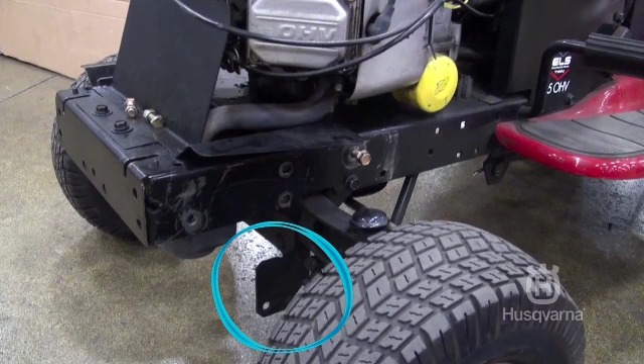This segment will show you how to attach the side plates for a tractor with dual front deck suspension brackets. Please note, if your dual brackets look like this, then please skip ahead to steps 5 through 7.

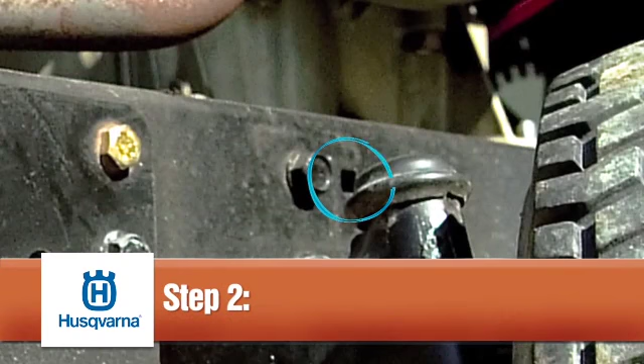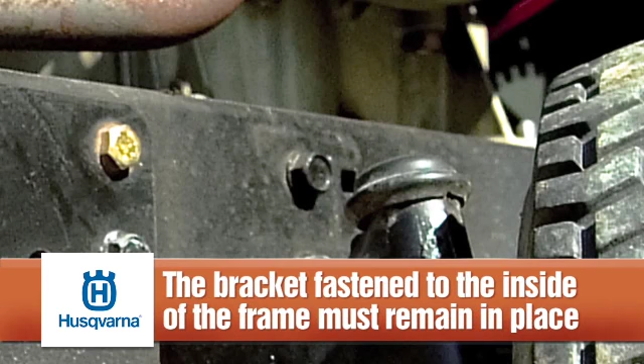Step 1. Remove the bolts from the front 3 holes shown. Step 2. If a bolt is present in the 4th hole, replace it with a 5/16 inch by 1 inch carriage bolt, part J, without a nut. Please note that the bracket fastened to the inside of the frame must remain in place.

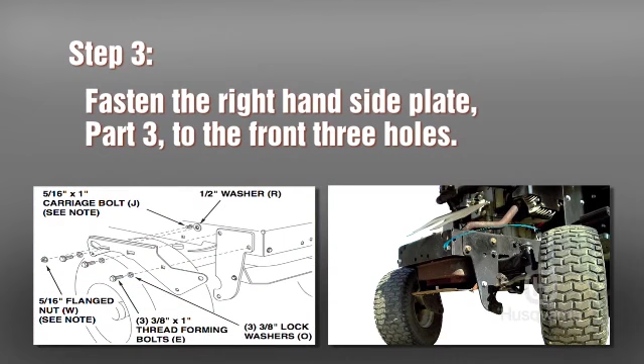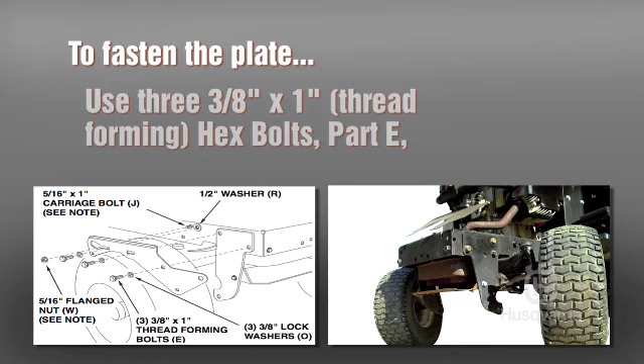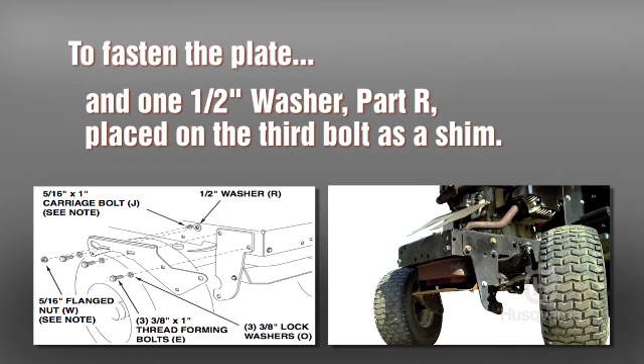Step 3. Position the right-hand side plate, part 3, with the bend facing out and fasten it to the front 3 holes shown in the tractor frame. To fasten the plate to the front 3 holes, use 3 3/8 inch by 1 inch thread-forming hex bolts, part E, 3 3/8 inch lock washers, part O, and one 1/2 inch washer, part R, placed on the 3rd bolt as a shim between the side plate and the frame. Now tighten all the bolts.

Step 4. Repeat steps 1 through 3 on the left-hand side with the LH or left-hand side plate, part 2. Please note that if you installed a bolt in the 4th hole in step 2, you should assemble a 5/16 inch flanged nut, part W, onto the bolt after the side plate is installed. If you've completed steps 1 through 4, skip ahead to step 8.

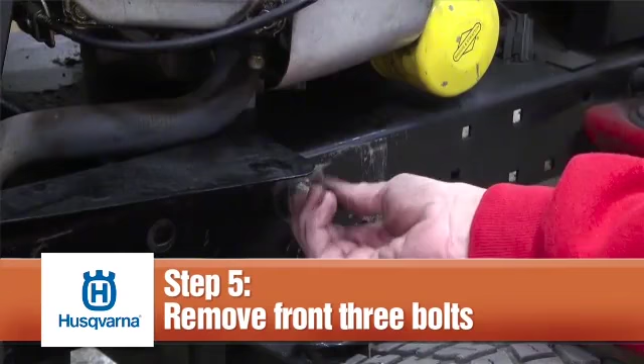Step 5. Remove the bolts from the 3 holes shown. Step 6. Position the RH or right-hand side plate, part 3, with the bend facing out, and fasten it to the 3 holes shown in the tractor frame.

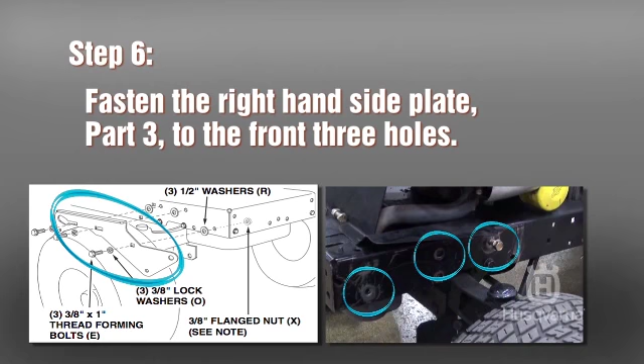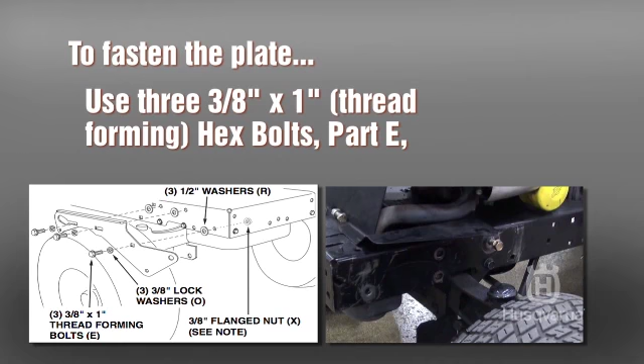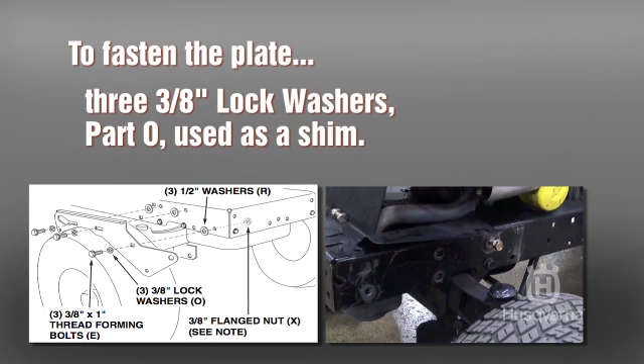To fasten the plate to the front 3 holes, use 3 3/8 inch by 1 inch thread-forming hex bolts, part E, 3 1/2 inch washers, part R, and 3 3/8 inch lock washers, part O. Use the washers as a shim between the side plate and the tractor frame. Now tighten all the bolts.

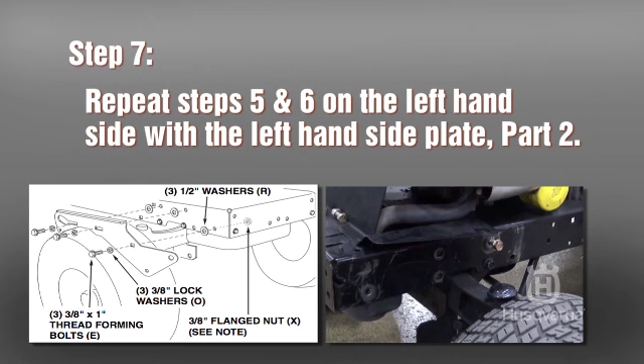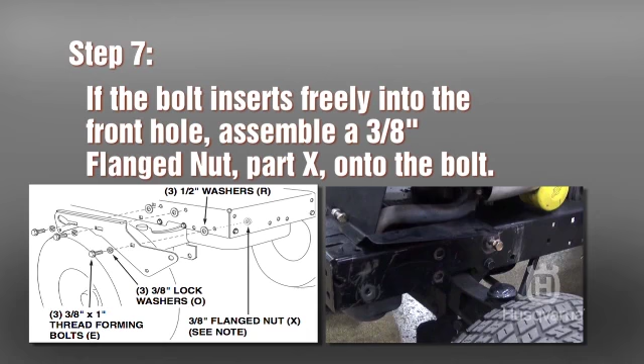Step 7. Repeat steps 5 and 6 on the left-hand side with the left-hand or LH side plate, part 2. Please note that if the bolt inserts freely into the front hole, assemble a 3/8 inch flanged nut, part X, onto the bolt. Step 8.

For both types of dual brackets, assemble a shoulder bolt, part L, and a 3/8 inch washer, part T, to the outside of each side plate, securing them each with a 3/8 inch flanged nut.